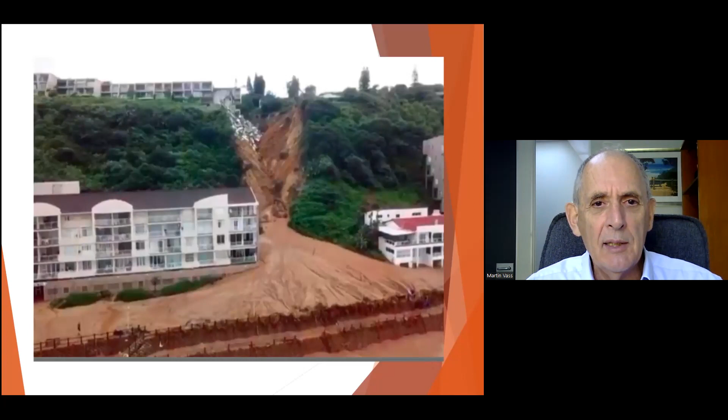It's taken many, many months to clear out those apartments, and obviously there was demolition work above as well. If you go a bit forward, you can see quite clearly how it's collapsed. On the existing structure on the left-hand side, I think we went back two or even three apartments to get back to something that was stable.

Behind that, right at the back of that donga, you see there are the parking garages. Again, we had problems with lots of vehicles being taken down through here as well. That has all changed now - there's a very large inlet structure right above, behind this development, and pipes going down now, taking the stormwater straight out into the sea. I think I've got some photographs showing those pipes.

Martin, were those buildings evacuated before that happened?

Some of these ones on the right-hand side that were developed were in fact holiday homes. They weren't evacuated, but I can assure you no one was actually killed in these apartments. They weren't evacuated because this thing happened very suddenly. This material here is sand - the old sand dunes going back many, many hundreds of thousands of years - and it's very susceptible to water, so it just washes it away. But no one was actually killed; they were evacuated afterwards, I can assure you.

This is what the road looked like through Umdloti. On the right-hand side, I'll show you another picture - this is where people used to walk in the evenings, and as you can see now, it's an absolute disaster.

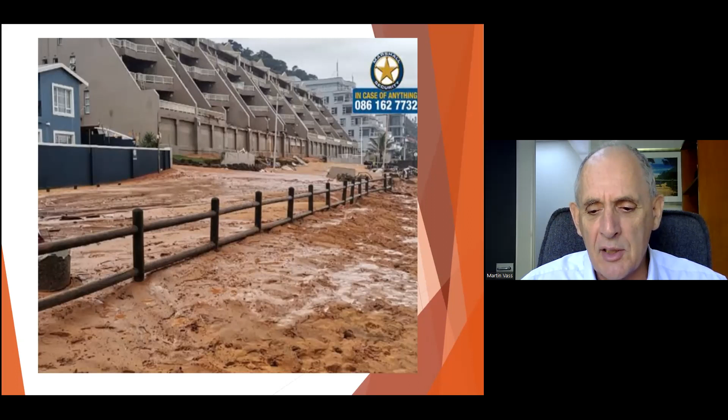This is one of the apartments where the water came in the back of the building and came out through the front, through the patio area. It's quite a nice mud waterfall going on there, and I think I have one taken actually inside, I'll show you.

You have two types of pile. One pile goes down onto solid rock, and the house will then sit on the rock. Or you have a friction pile, which depends on the friction of the sand against the concrete. Now, with the sand being washed away, there was no further friction. That house, in fact, was demolished. The house was taken away. We couldn't save the house.

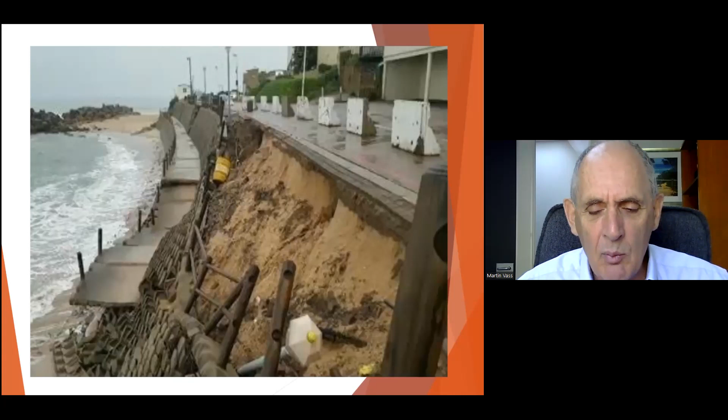So the place is looking a lot better. The damage is still very visible on lots of the structures there. So it really was absolutely devastating for Umdloti, absolutely devastating.

What we did on one particular part, we had two Range Rovers in the garages, and we used a crane and just picked them out. We took the roof off and just picked them out. So this structure again was totally demolished. None of this apartment building was saved. We took it all away and we replaced it now with grass.

If I can see the grass coming up, maybe, yeah, so that's what we did. We took that away and going back - so that was taken away, that was all cleaned out. This big donga in the front was all filled in.

I'm not that keen on the design here. I think those pipes should have been a bit lower because I think they'll just take the beach away during a heavy flood. But that was a council design, and we weren't involved in that design. So that's hopefully going forward will now stop another donga being formed if heavy rain occurs again, and also with the discharge from the development above.

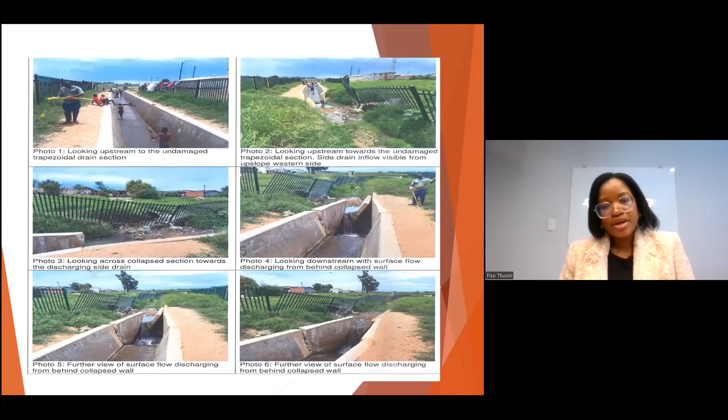Martin, would the responsibility then be with the engineer, if there's any damage or mistakes, or with the mining company? Never with the mining company. The mining company, when they give out the contract, puts the responsibility on the contractor, and it becomes a disagreement between the contractor and the consultant, which we've actually had on this claim.

What happened on this claim, the contractor said, we did enough security, we put enough bags down. The consulting engineer says, no, you didn't. We told you over and over again, you didn't put enough bags, and therefore we don't believe you have a claim. It went back and forth for some time, I can assure you. And what has happened now, insurers have agreed to a compromise offer. We've made a compromise offer, which at this moment has not been accepted by the contractor.

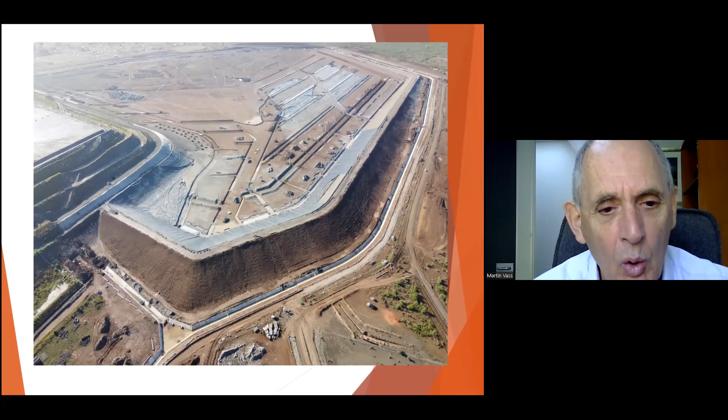But yes, it's never the client. Normally it's not the client, because the client takes those responsibilities and gives it over to the contractor or the consulting engineer. They don't hold it themselves normally.

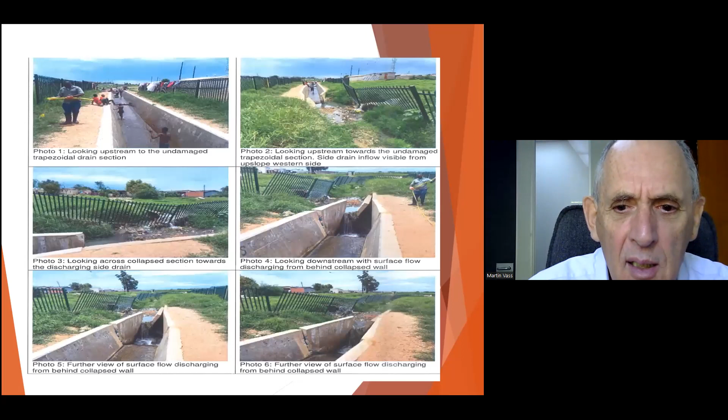What they did here is they put what you call a weep hole. Those are holes, and I don't think we can see them on this. But at the bottom of these walls are weep holes, which are holes through the concrete. And then behind the wall you put stone material, which drains easily. The idea is the water comes against the wall, runs down through this stony material and goes out through the weep holes into the canal.

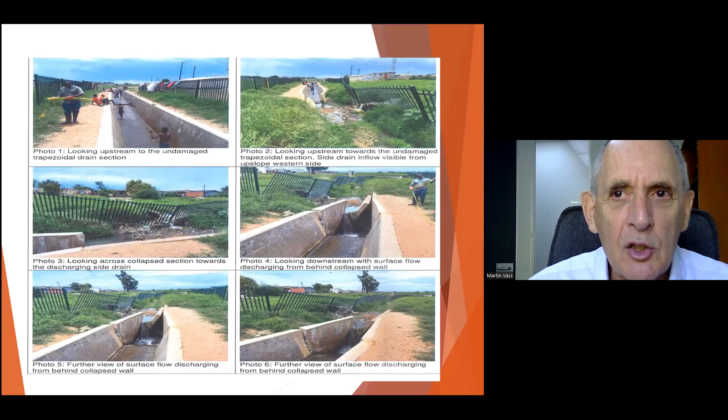That is the idea, but what happened here is they didn't protect the stone. They should have put a material called Bidim, which is like a shade cloth material to protect the stone and prevent soft ground going into it, keeping it free draining. They didn't do that, so after a short period the soft material went into the stone, and the stone no longer worked as a drainage material. Then the pressure built up from the rain.

Now going forward, this is how you normally do it. So before the concrete, you put these vertical drains in, called wick drains, with pipes sitting out the bottom, those white pipes, which then go through the concrete. I'll show you another one.

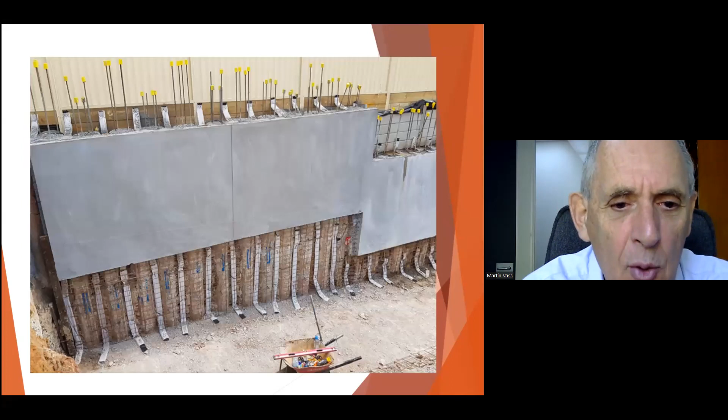So those are called wick drains, and this is what happens. You put the drains in, it comes out through the wall at the bottom, and then you cast the wall. That is typically how you do it. They didn't do that at all. They put in this stony material with drains, and the stony material just got bunged up with soft material and no longer worked. With that, the pressure of the water literally pushed those walls over.

And did they do that because it was less expensive, or was it just a design failure? It was a design failure.

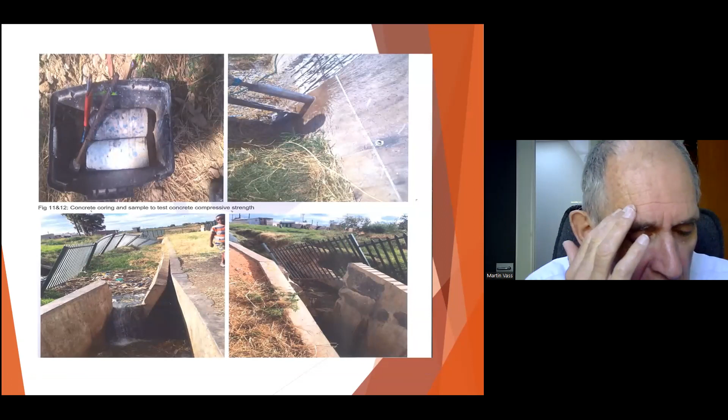It's the first question we asked when we had our first discussion with them. The Bidim - we looked at the drawings and couldn't see the Bidim. We said to them, 'Where's the Bidim?' And they said it was never put in. So without the Bidim, the stone material doesn't work. You have to protect the stone material to stop soft material going into it and bunging it up. So they didn't do that.

So they would have been better off putting something like this, so the water would drain behind the wall and come out through the holes. That's what they should have done. So it's a design error.

But it's expensive. You're going back now, and it's actually worse, because now you're not building anymore - first you've got to demolish all this concrete, clean the whole place out, take away what's left of the fencing, and start again. So you've got a greatly increased cost than the original project.

Yes, and the clearing away is usually more expensive than the rebuild. Quite right - you've got to knock all this concrete out and protect it.

And going forward, I'm not sure what you do about the children, because if you put all the fencing back up again, you see what happens to the fencing. So how are you going to stop the children going into the canals? It is a problem, a real problem.

We have it on another job in the Free State, and I don't know why I got photographs of it, where they left the trenches open, they filled up with water, and the children fell into these trenches. A big problem, and I think I got a couple of those photographs.

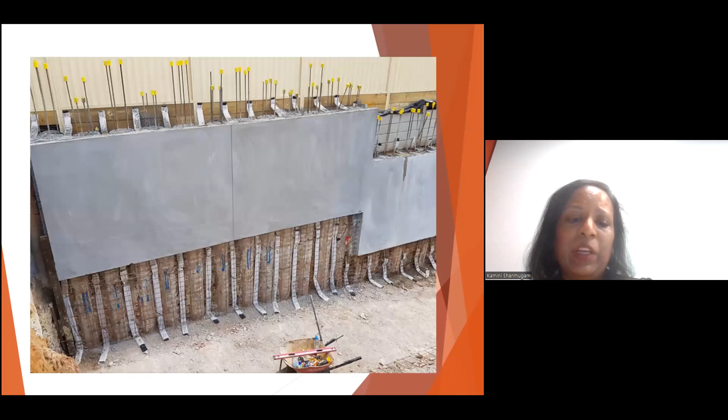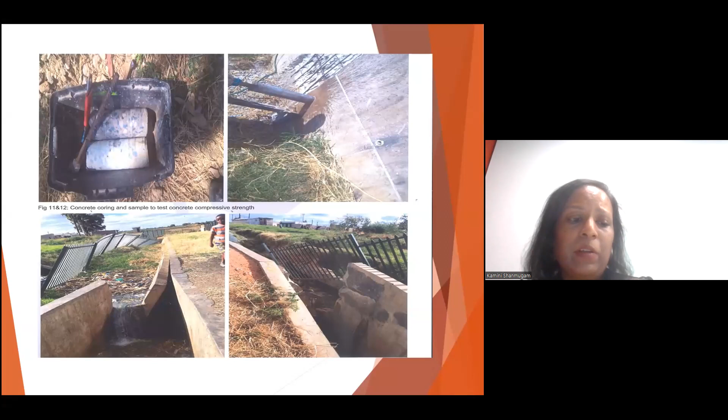And then Kyle asked, did the contractor not pick up the issue within the maintenance period? The issue was a design problem. If it had been picked up in the maintenance period, it was not a contractor's problem, it was a design problem, so you would have been left with the same situation - you can't retrofit, you can't go back and do anything about it. The mistake is in the design. But if it had been a contractor's problem in the maintenance period, then you don't issue a final completion certificate. What you do is have the practical completion certificate, and normally a 12-month maintenance period. If in fact it's a contractor's fault, you don't issue a final completion certificate until they've sorted out the problem. Then you're not bound by the 12 months - you could go on until they complete the remedial work. We have that on many projects where something happens in that 12-month maintenance period, and the final completion certificate period gets extended.

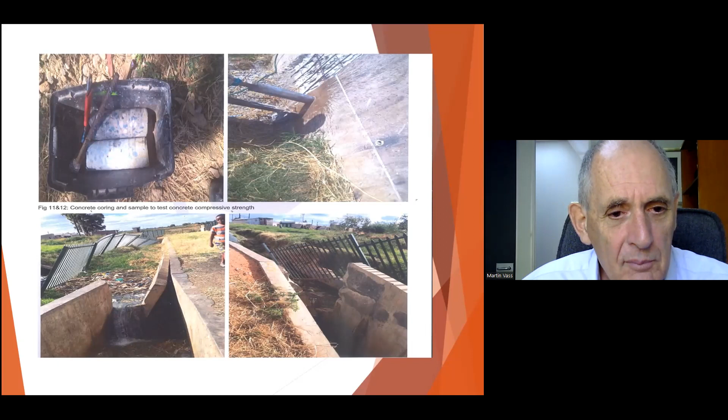Anyone else? Thanks, Martin. No, nothing else on this one.

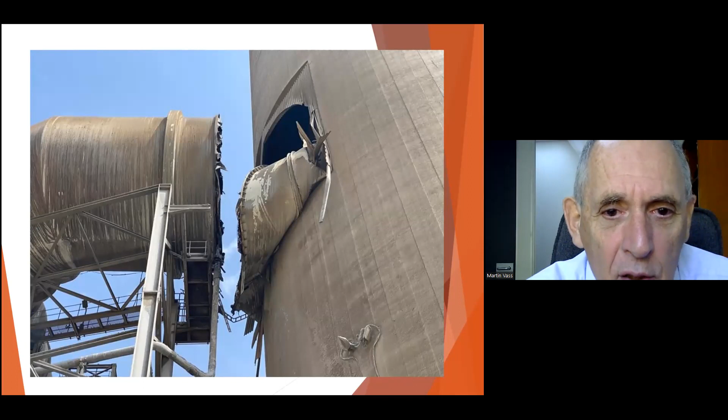This is one of the flue tubes. On the right-hand side here you have the concrete windshield. Going into the windshield are 3 flues, and I think I have it here. Yeah, those are the 3 flues, coming in to the windshield. This is the windshield, with stairs on the right-hand side to walk up it. So these 3 flues coming in here are from 3 separate turbines and 3 separate boilers. They go here and then up, discharging into atmosphere at the top.

The top left-hand one there is the one which has failed. What's happened is material built up inside this duct, and this duct is 9 meters diameter, which is very large. That duct filled up about 2 meters with ash, lime and water, getting to about 90 tons of material, which resulted in that top left flue dropping about 2 meters.

So that flue is out of action, therefore the turbine is out of action, and immediately that comes off the grid. Because of the potential of that top left one collapsing, they took the other 2 offline as well. So we went from level 2 to level 4 load shedding because we lost these 3 turbines.

So the option now is to take this away, clean it out, and use unit number 6, which you'll remember was still under construction. That left-hand one is still under construction, and we have the flue tubing for that unit. So we're going to take unit 6 and remove that top left-hand one, which is unit 1, replacing it with the ducting from unit 6. But it's going to take us about a year to do that.

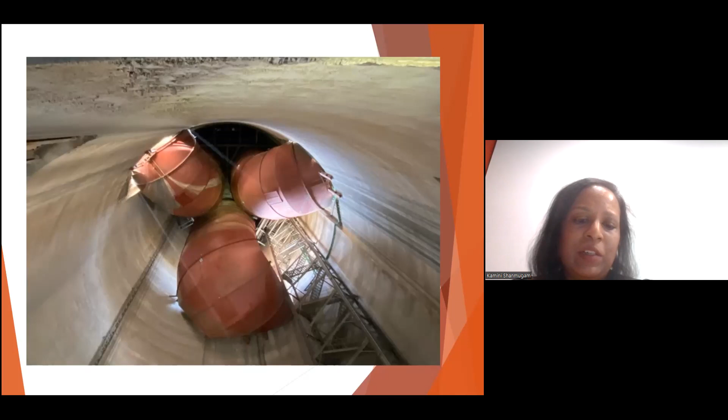We have a question, Martin, please ask. Is it the same at Medupi? Yes, it's the same design at Medupi, exactly the same. It's also got the desulfurization plant, but at Medupi only 1 unit is working at the moment, the other 2 are not working yet. So hopefully they do their homework at Medupi and clean those ducts and don't allow them to collapse. We know what happens now, which is a little bit annoying, because they were told before the collapse that this was a possibility.

So what are the consequences of not having the desulfurization plant? Are people just going to get rained on with acid rain? Yeah, you're blowing the sulfur out through the top, so it drifts downwind, goes through Mpumalanga, across to Kruger Park, and if you get any rain, then you get acid rain, because water mixing with sulfur gives you sulfuric acid. But bear in mind, all the other power stations here are blowing out sulfur anyway, they don't have a desulfurization plant on any of the other power stations. They've been blowing out sulfur for years and years and years.

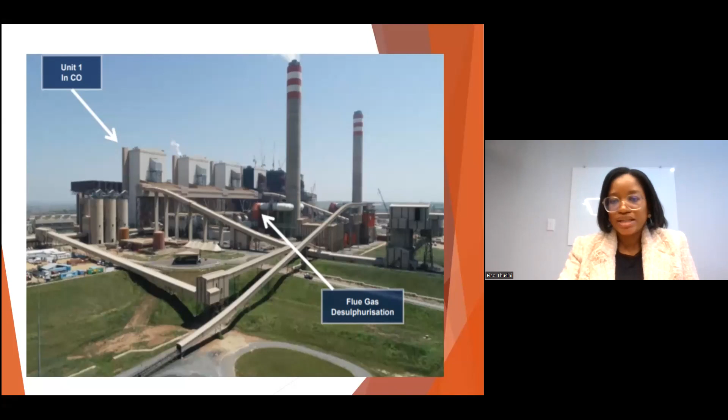Anyone else? We did have another question from Taba, asking if there is a stage where the designs get submitted before the project starts construction. Yes, absolutely, the design is done before any construction starts, the design is finished and the drawings are issued. On a very large project, let's go back - on a small project, like a house, all the drawings are complete and given to the contractor, and he builds.

There are changes made. Someone will come along and say, oh no, I want something different in the kitchen or something, and that would change.

On a large project like this, the design is done very much in advance. But the drawings are only issued as the work progresses, because there are thousands and thousands of drawings produced as the contract goes forward. This contract is 6, 8, or even 10 years long, so the drawings are changed and modified as design is changed, but the basic design is done before the contract is awarded. Because you've got to order the big parts - the turbines, the boiler - organize the big items and purchase those. Therefore you need to design before you start construction, but the drawings are changed as the work progresses.

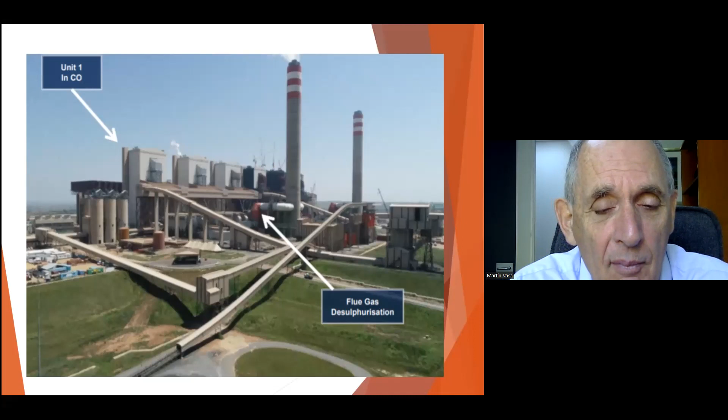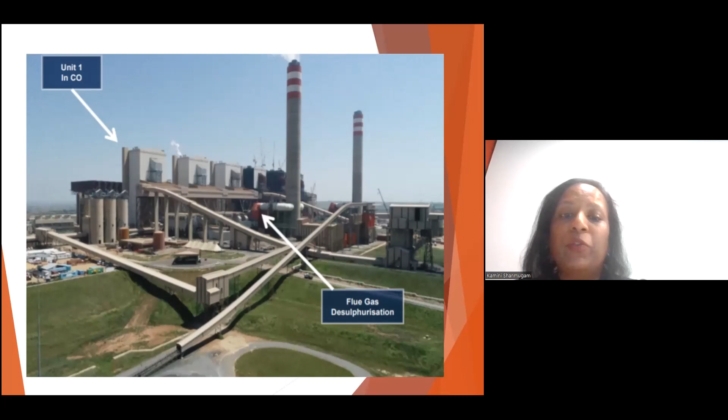Why was the error at Kusile not rectified before failure? That's a question you have to ask of Eskom, because they were aware this was happening, and what they should have done is taken that unit offline, stopped any hot flue gas going through it, and cleaned out that material. Go in there, clean it out before this failure occurred. Absolutely, there's no doubt about it. That should have been done, and it wasn't done.

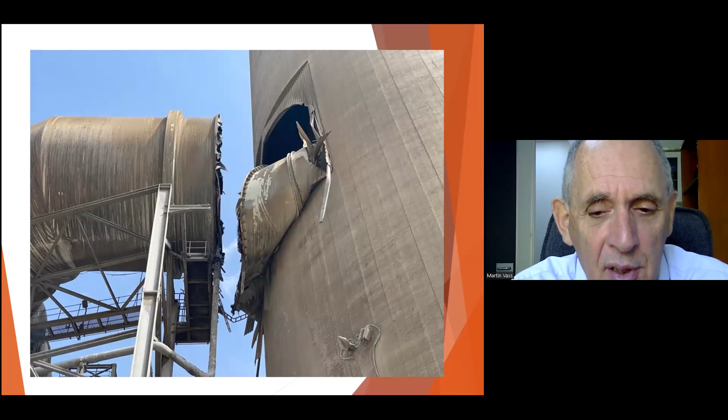What is the danger of sulfuric rain? It's sulfuric acid, or sulfur rain. Sulfuric acid is harmful not only to us, but harmful to crops and animals. It's really not good to have sulfuric acid. It's very harmful material, not good to breathe - even sulfur is not good to breathe. Certainly sulfuric acid on the environment is bad. Acid rain is bad for the environment, bad for rivers, bad for wildlife. It's just not good to have.

That's why they put these desulfurization plants in these new power stations. There's no discussion about going back to the old ones and retrofitting - that's not being discussed at the moment, because Eskom said to go back and retrofit the old ones would cost something in the region of 400 billion rand, and no one's coming up with the money. I think the World Bank is putting forward various proposals so we come off coal and go more renewables, but I haven't seen much happening on that yet.

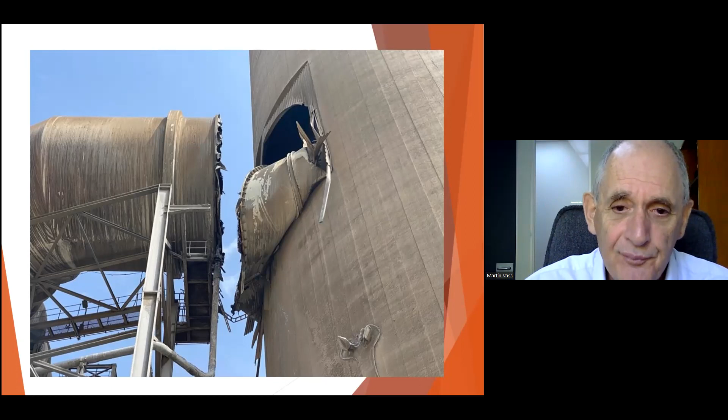It sounds a bit doom and gloom, doesn't it? Very scary - it doesn't sound scary until you put it up on the screen here. Then it looks scary.

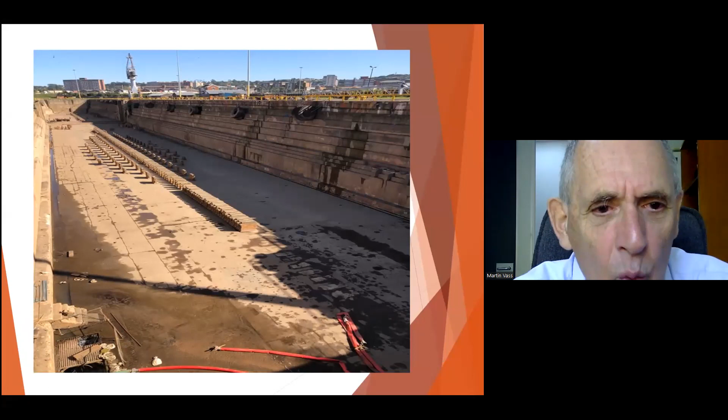What was happening at the pump station at the time, this dry dock is about 90 years old, way back before the war. And what they were doing here was replacing all the pumps. So if I can go down one, that's the dry dock. Typically you fill it with water, open the gates, fill it with water, the ship comes in. As you take the water out, the ship settles on those timber bearers there, so you can clean it.

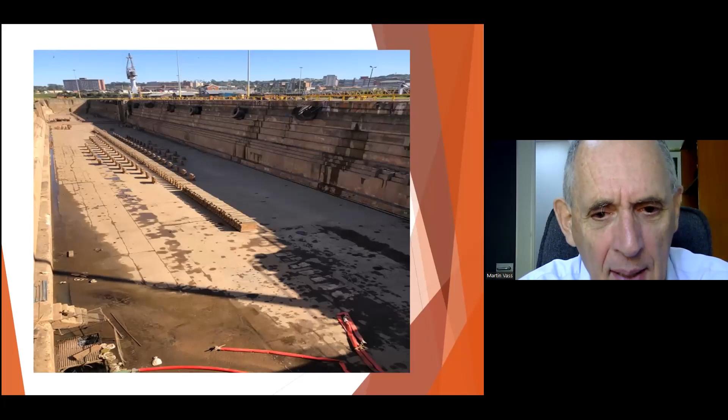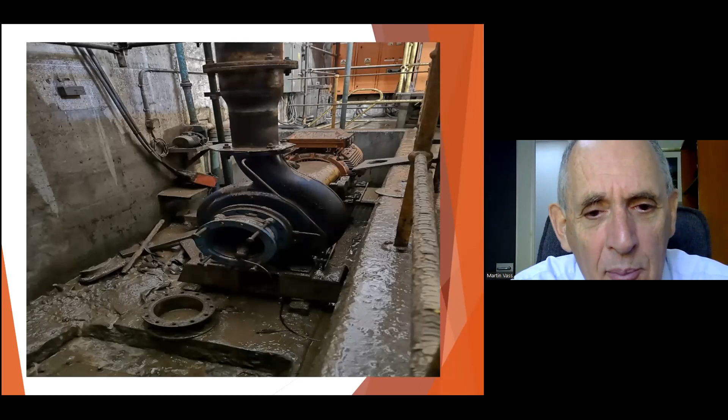A lot of money went down the tubes here. You can see the damage from the flooding, very extensive damage. So all these new pumps, we managed to save the casings, but the motors and everything gone, so we had to replace all that. And that was, again, a flooding last year in the town.

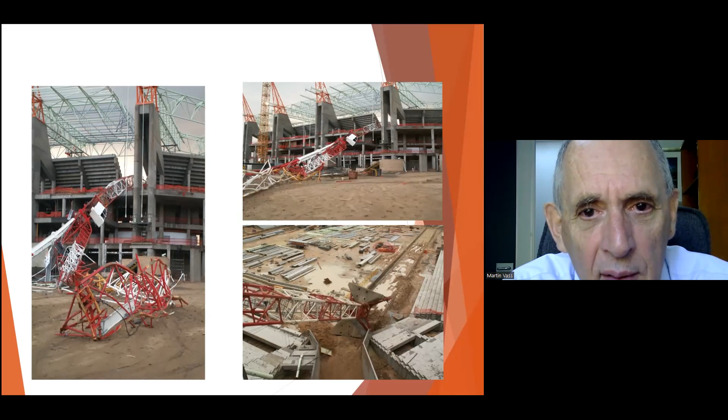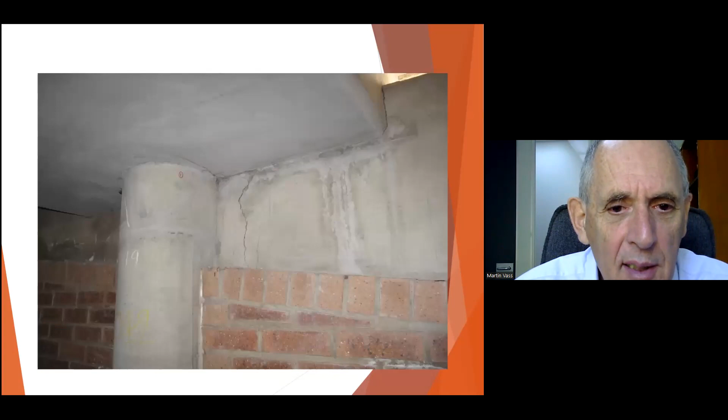This is a parkade, and I've got a couple of pictures of the parkade, this one at the station. What happened here is they designed it with what we call post-tensioning. Again, it was a design defect. They put insufficient steel, you see the cracks starting to appear, you see the cracks starting to appear inside, you see the cracks appearing all over this. They put insufficient steel in the design.

We tried to save it, but we put carbon fiber strips under that slab. Carbon fiber is the type of material that you adhere to the bottom of a concrete slab to supplement the amount of reinforcing steel. They put in the carbon fiber - we didn't want to, but the contractor wanted to do it. He went ahead and did it. He spent 18 million rand on carbon fiber.

It didn't work. So what happened? This parkade we demolished. We took it all away and we rebuilt the entire parkade.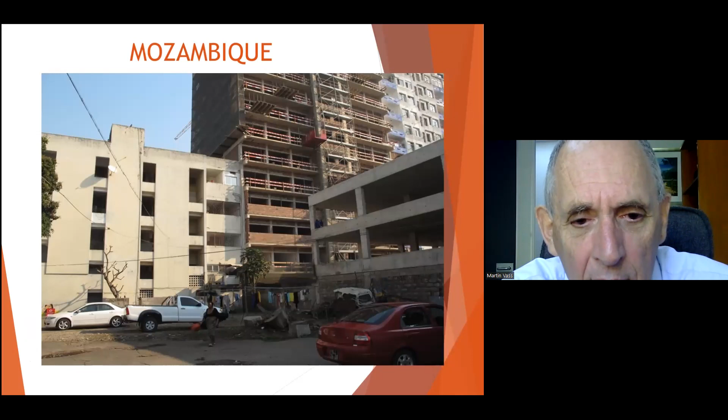So here we had to come in, we didn't want to demolish that entire building. So we came in here and we did grouting and underpinning on this existing new building. We also had to come back and repair this old building here, had to do some fairly extensive work on it.

It's a lateral support issue, a strict liability claim. There is no argument - if you've damaged someone else's building by your structure on the right, you have no argument. You've either got to repair it or come to some agreement.

So we went in there, repaired this old building and underpinned the new building to make it more stable. Why is it built so close together, Martin? Shouldn't there be a space here? Touching each other? Or is there a space that I just can't see?

It's literally every square, I can't believe it. That was one of the first questions - why didn't you just leave a small passageway between the two buildings? I think it still would have been affected because it didn't drag the building, it dragged the foundations down, but not quite as dramatically as this, where they built it directly against it. It's very unusual - in South Africa we don't build one building against another, we normally leave a small gap.

So we had to come back and demolish that slab. We then did a design check on the rest of the building and found the other slabs were the same. So we had to retrofit this building - put in additional beams and additional reinforcing on those floors to hold up the existing floors before we repaired the building. That was a design error that was under the PI policy.

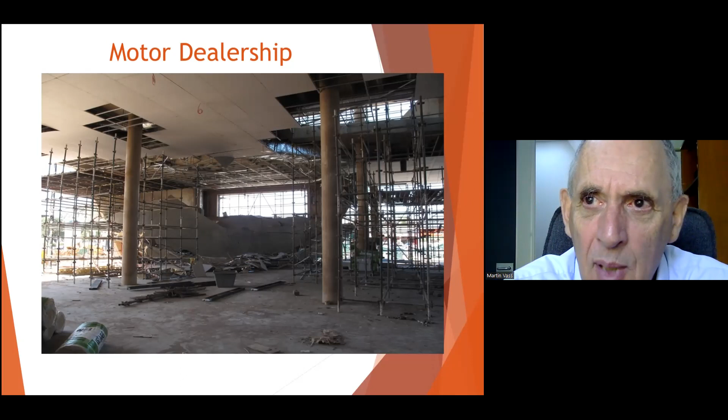So what often happens is a young engineer - and it's not just them, we have a lot of other engineers also making mistakes - whatever the computer tells him, that's taken as right. It doesn't matter if you put junk in, the answer is assumed right. So junk in, junk out, and that's what we're finding a lot of. The computer tells you to do this, and that's how the design is done.

You're quite right, these errors should be picked up at design stage, there's no doubt about it. Fortunately they're not, because I wouldn't have a job. But yes, they should certainly be picked up at design stage.

A lot of the bigger companies - I think of people like Arup and those kinds of firms - have an in-house peer review program. Once the design is done, they give it a peer review within the company itself. That's done at the larger companies, but a lot of smaller companies don't have the manpower for a peer review design. It's a good question that's been floated around for a long time now. Yes, you should pick it up at design stage, you shouldn't allow the design to go out with errors in it. You're right. Thank you.

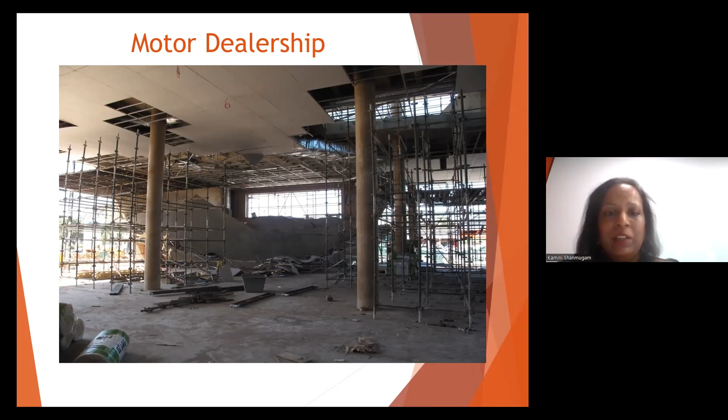But also in these types of claims, to me it seems like such a fine balance, because you can either under-design or put in too much steel or propping and over-design, and then get sued for that. Kamini, you're so right. We have a lot of claims at the moment, mainly in structural steel buildings - like a warehouse or factory - where engineers are being sued for over-design.

They are saying, you know, you could have made this a lot cheaper and saved us a few million rand. So they really work on a very tight balance between sufficient and not too much. It's a very fine balance.

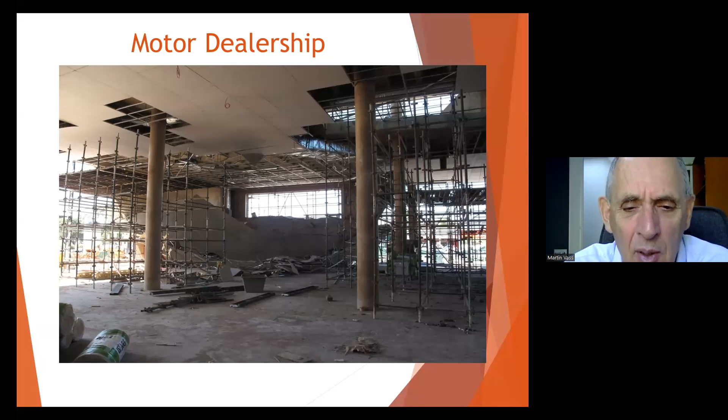It really is. We have a warehouse at the moment which they're suing us for a lot of money because they said we've over-designed the trusses and the beams. It's difficult, very difficult. The engineer is working, and the client is saying, I've only got a budget for so much. The engineer should say, I don't care what your budget is, this is the right design. It's a balancing act. It's very difficult.

It's quite an argument, it really is. And this is not the first one. We have one like this in South Africa, very similar to this, where we said you've overloaded. In fact, the one in South Africa, we repudiated, and the repudiation was accepted. The client did pay. But this one in Ghana, we've actually paid for.

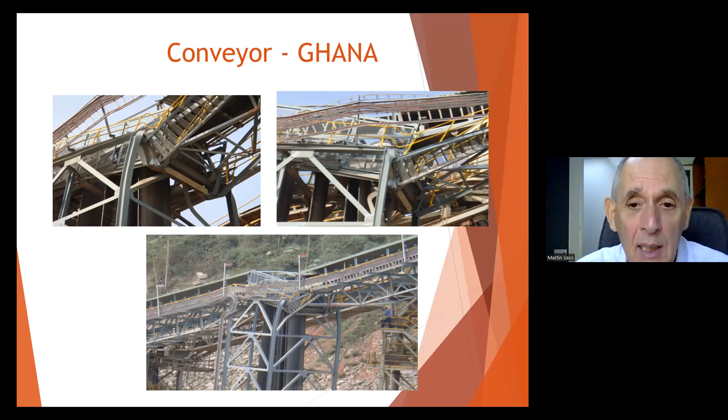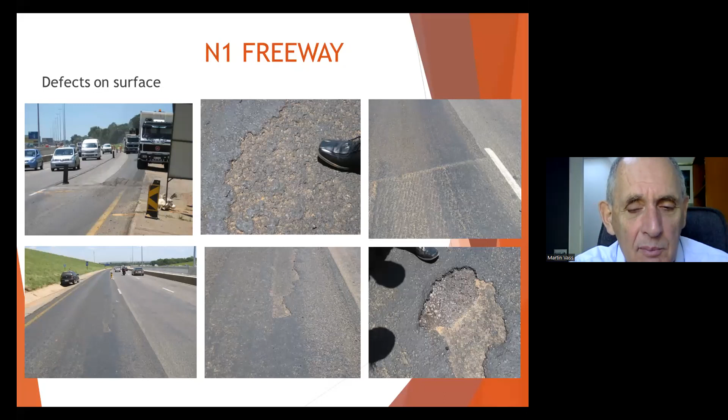That was part of the claim, and it was paid. But that is a fairly straightforward CAR claim - there's damage to the works, no argument on what caused the damage, and no design defect. That would be a straight works claim.

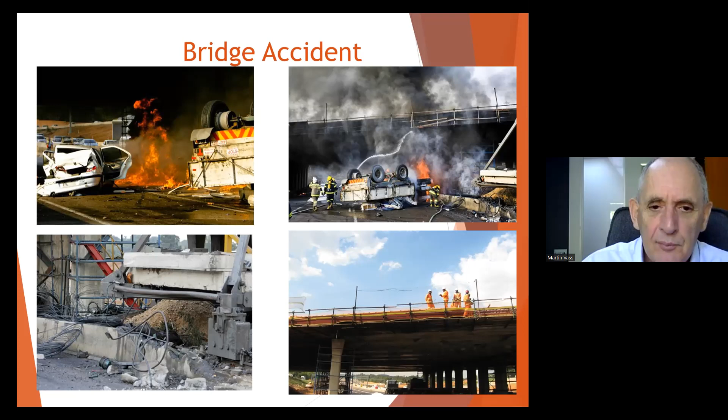We don't like that particular type of roofing. But anyway, the claim was paid. It was picked up under the works policy - it was not a design issue. It was a windstorm that exceeded the design; I think design was 1 in 30, and it well exceeded that design of 1 in 30. The insurers paid under the works policy. That's a fairly straightforward claim.

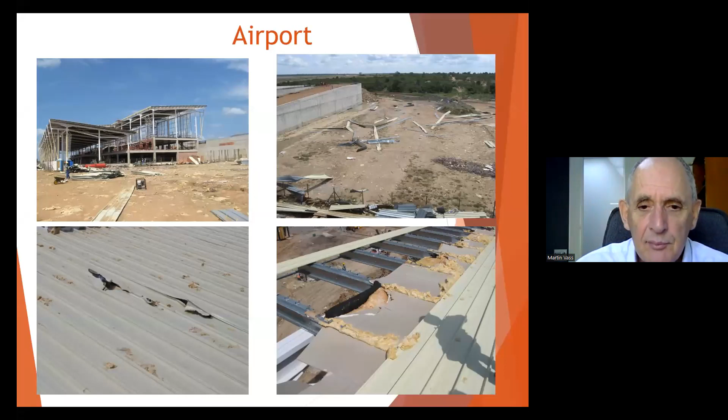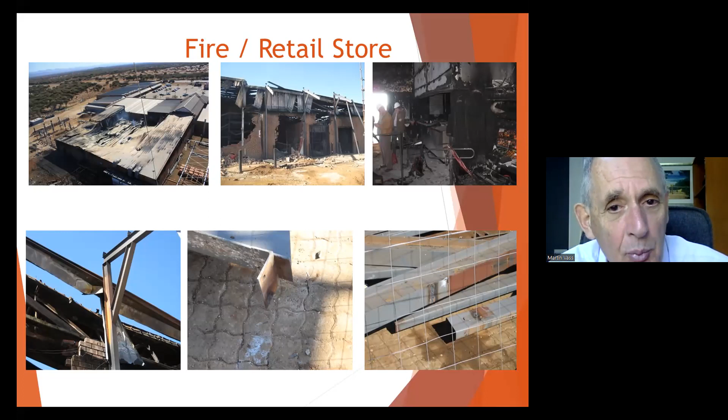So then you had a liability claim from the existing building, and a works claim from the new building. But again, these kinds of claims are not too complicated. You've got a works claim and a third-party claim coming against you, and as long as you have adequate cover, something like this really shouldn't be a problem. In fact, that one was paid out - it's more a problem clearing up rather than actually doing the claim.

This was quite a complicated claim, in Australia. They were building an island to put a plant on it, and had already bought the plant - a steel plant - from Germany. They loaded it onto ships and brought it out to Australia to put on this island. But there was very bad communication between the contractors building the island and the guys bringing over the plant. So the plant arrived, but the island wasn't finished.

Those ships had to sit at anchor for a long time while they finished the island, and there was a lot of dispute on this one. Every policy was triggered - the PI, the works policy, the liability policies, all triggered on this one. We got involved, did all our investigation, and then advised insurers to walk away from it. This was a contractual dispute, not an insurance claim. And in fact, we did walk away from that one.

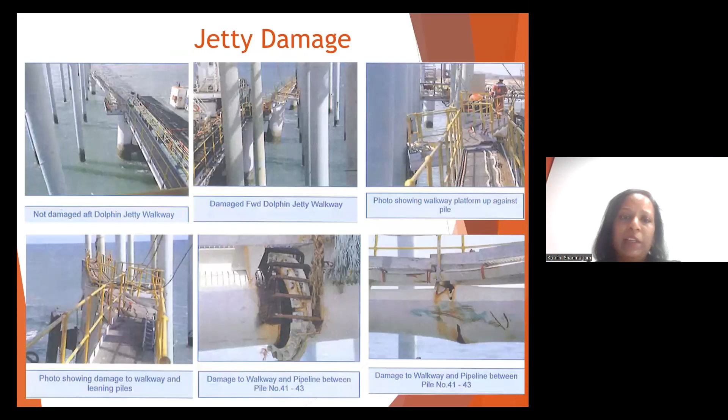Martin, I see that we are at 11. Oh, I'm not halfway through yet.